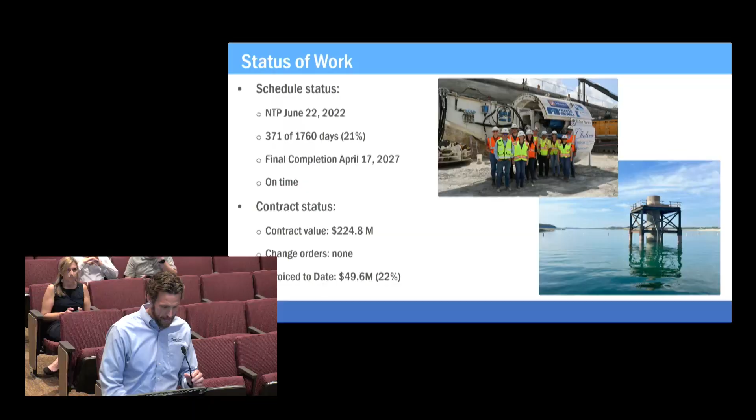Okay. Good evening, Madam President and Board. I'm excited to give you an in-depth update on the status of construction for the Phase 2 raw water delivery system. To kick it off, I want to start by reviewing the status of the schedule and cost for the project. We're, of course, in the grand arc of this project, still kind of at the beginning, with notice to proceed having been issued in June of last year. But we are now, as of last week, over a year into construction, which puts us roughly at 21% complete. And we will complete the project still in April of 2027. The contractor is currently on schedule for an on-time completion of the project.

On a cost basis, the total contract value was originally just under $225 million. And based on the applications for payment that have been processed as of the end of May, we're right at about $50 million or 22% of the contract. And happy to report there are currently no change orders on the project.

So now I want to spend the rest of the presentation with a number of slides showing photographs walking through the status of construction at the main work sites for the project. We'll start by looking at the pump station site, which is on Lime Creek Road, adjacent to the Cedar Park Water Treatment Plant. After the contractor prepped the site, the critical path of the project runs through the work at the pump station site. The first major activity that needed to be completed was construction of the main construction shaft, which is the 300-foot deep, 30-foot diameter hole that the contractor is using to construct all of the underground work, the tunnels going both directions. And you can see some photographs here.

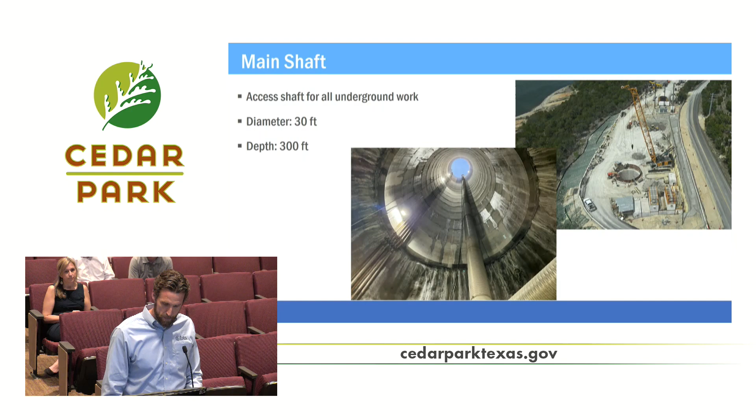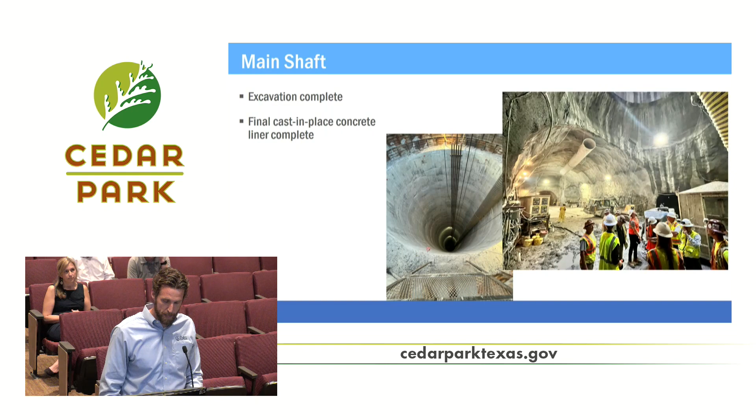The main shaft for the project has been completed. The excavation has been completed, and the contractor also completed the final cast-in-place concrete liner as they excavated down to complete the main shaft. Once the contractor finished up with the main shaft, they moved over to start working on what we call the suction chamber. The suction chamber is a large horseshoe-shaped cavern underground that will be used to withdraw water from once the pump station up above has been completed. It's about 100 feet long, 30 feet tall, and about 30 feet wide.

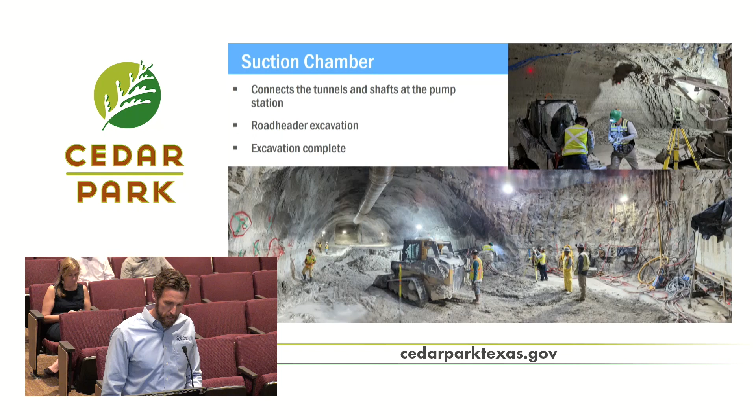It will eventually connect the pump station over to the existing 78-inch pipeline that was installed in Phase 1 on Trails End Road. It's 2,600 linear feet of tunneling. It'll be constructed by a tunnel boring machine. The tunnel boring machine has been delivered to the site and named Miss Chelsea by the underground construction group. It has been assembled now underground, and as of last week, they have started mining for the transmission tunnel.

They anticipate needing up to about 3 months of time to complete the tunnel, but based on some of the progress they're making here early as they dial in the tunneling operation, they're likely to be able to complete this first tunnel more quickly than that.

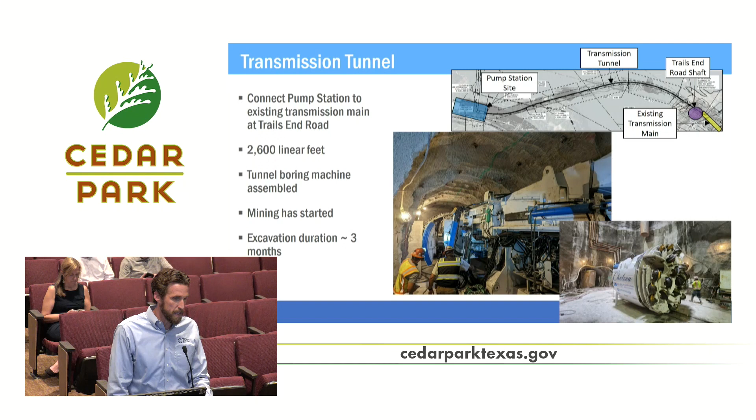Once they get across the lake, they will arrive with the tunnel boring machine at what we call the Trails End Road shaft. And this is a vertical shaft that will be constructed to bring the pipeline back up to grade so we can connect it to the existing pipeline on Trails End Road. That shaft has been constructed. It's 130 feet deep and a 10-foot diameter.

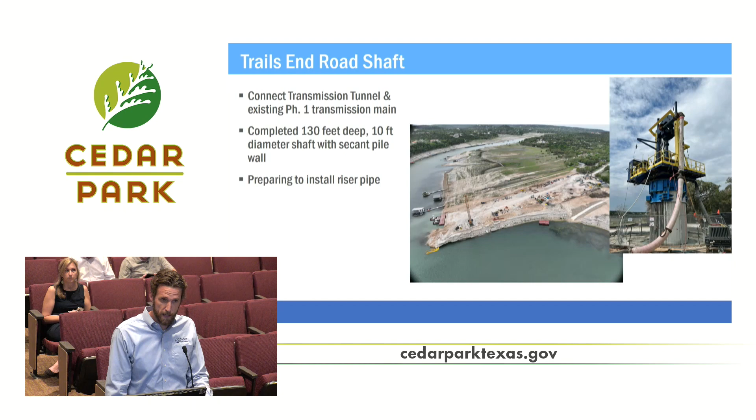You can see the pile top rig in the photograph to the right that was used to construct that shaft by blind bore method. They also completed a fairly significant secant pile wall around this structure to provide support in the overburden. And right now the contractor is preparing to install that riser pipe into this shaft. So they'll get that installed, they'll grout it in place and tunnel up to it to make the connections.

Once the contractor has completed the transmission tunnel, they will turn their attention to the much longer intake tunnel, shown in blue. The intake tunnel will connect the pump station to the intake riser pipes out in Lake Travis. It's about 9,000 feet long, and they will construct it also with that tunnel boring machine. They will go through a fairly laborious process of walking it back out of the transmission tunnel once it's been completed, flipping it around and getting it oriented to mine the intake tunnel. And they're expecting on this longer tunnel to need about 9 months to complete it.

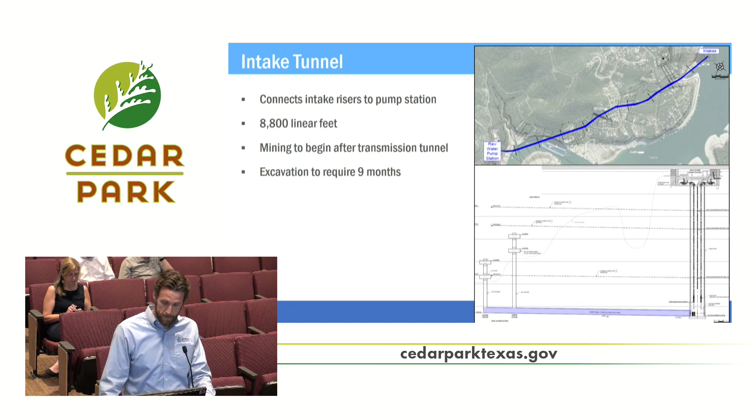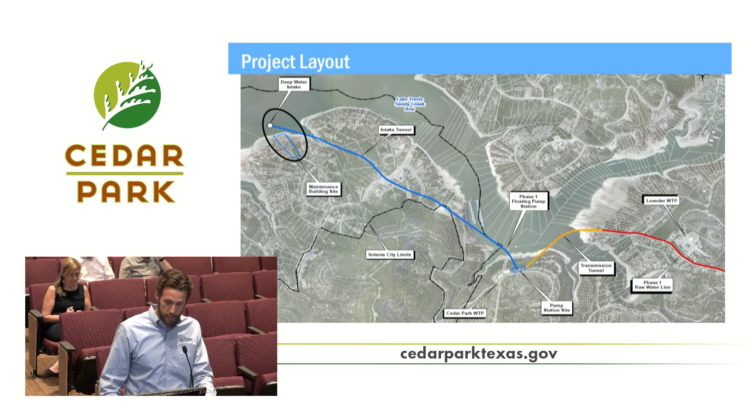At this point, the contractor has completed excavation of both of those shafts, and they're demobilizing a bunch of the equipment used to construct the shafts so that they can prepare to place the riser pipes in each of these 2 shafts in the lake bed, which is work that we anticipate occurring probably in the late July timeframe. And once they have completed that work, they will have done what I think is the most difficult marine work on the project.

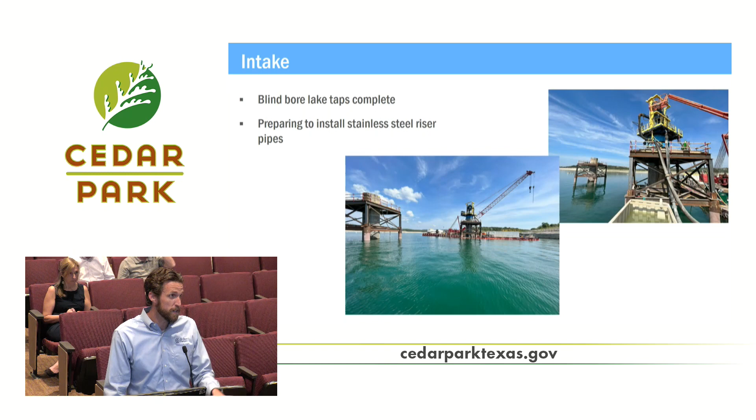And that was a little bit of an interesting issue on the construction of the intake. This was something that they originally were going to do later in the project, or perhaps would have been required to do later in the project because stainless steel availability was kind of an issue when the project was bid. But that supply chain has calmed down, and the contractor looked at this work and wanted to take advantage of the lake being low. There's not a lot of things we cheer for with the lake being low, but construction of the intake was something that really benefited from a low lake.

And then onshore, adjacent to the intake, you can see the marine operation out in the lake. The contractor has been working on the foundation for the maintenance building. This work is not on the critical path, so they complete it as crews are available and shift their resources over to this location from time to time to work on it.

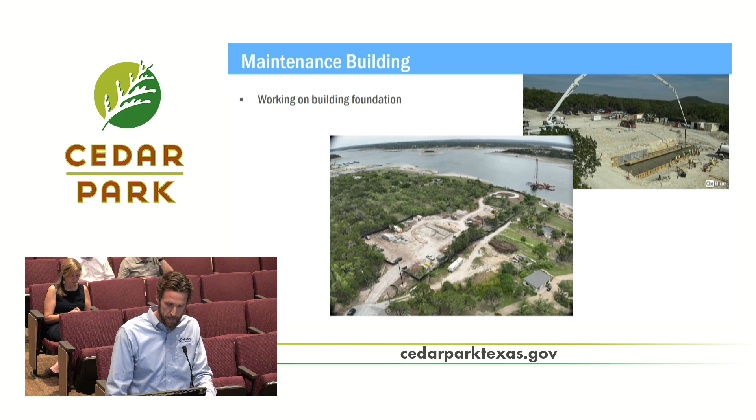So looking forward for the next 6 months, the major activities the contractor will be working on is completing the mining of the transmission tunnel. They'll install the vertical riser pipes at Trails End Road and for the intake. They'll start working on mining the intake tunnel, and some preliminary plans are they may also start installing the liner on the transmission tunnel at the same time.

So there'll be some very complex operations occurring simultaneously at the pump station site. And then they'll keep working on the maintenance building as they complete this other work. And unfortunately, my next bullet got cut off, but we do anticipate over the next 12 months about $60 million of payment applications coming from the contractor, which would take the cumulative total up to about $110 million for the project.

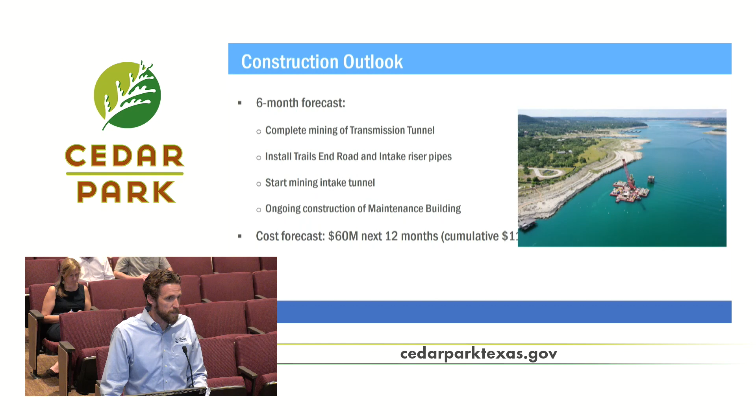I did also want to note that we did have a productive last 2 days with the contractor. We completed a risk management workshop where we go in about twice a year to update the risk register for the project with the contractor's team and huddle up in a room for a day to evaluate the status of some of those risk mitigation measures. And then this morning we completed an executive partnering meeting with the contractor as well, just to look at the work that's been performed over the last 12 months and continue to explore opportunities to improve the project.

So that is the end of my slide deck. I'd be happy to answer any additional questions about the project, and I do promise we would like to get all of you down to the tunnel and go down the shaft. It is extremely hot down there right now. That might be a really great trip in a couple of months, but we could start working on getting that scheduled as well.

Okay. And then, again, just curiosity, the pipe that runs from the intake to this location, either now or later, I'd just be curious what a cross-section looks like. Is the pipe going to have room around it that people can go in there and check for maintenance, or does the pipe fill the entire bore area? So for the intake tunnel, which is the larger 9,000-foot tunnel, that will be a cast-in-place concrete liner, a little bit over 12 inches thick. And so there will be no space around the outer wall of that liner and the rock that has been mined out by the TBM. Okay. All right, cool. Thank you.